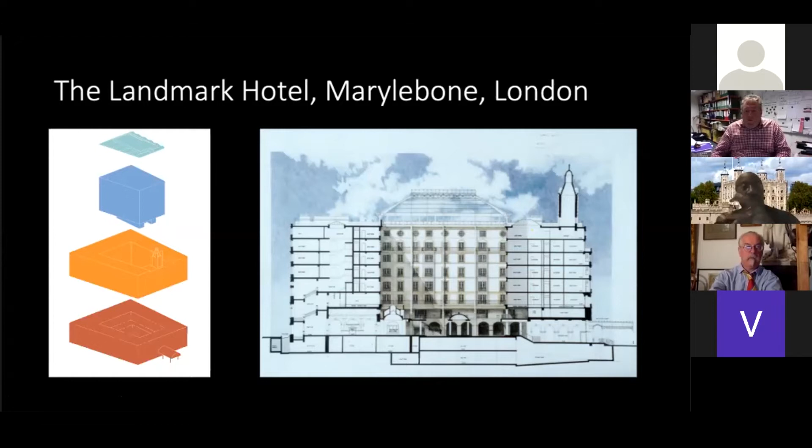We also created new internal atrium elevations, which were faced with Pyrox cement boarding, and there was the creation of a new subterranean car park. So what I want to constantly reiterate is that the architectural brain thinks on a macro scale as well as the micro scale. So it's the concept of the building in its entirety, but the elements at the same time that make up the building.

So moving on to a typical plan. The innovations with this particular scheme involve the green rectangles here on the left-hand screen, which represent prefabricated bathroom pods, manufactured in Germany. This model of bathroom pods is replicated on all of the floors throughout the hotel. It was a precursor to MMC, modern methods of construction, and it was one of the first major commercial hotels in central London to use that strategy.

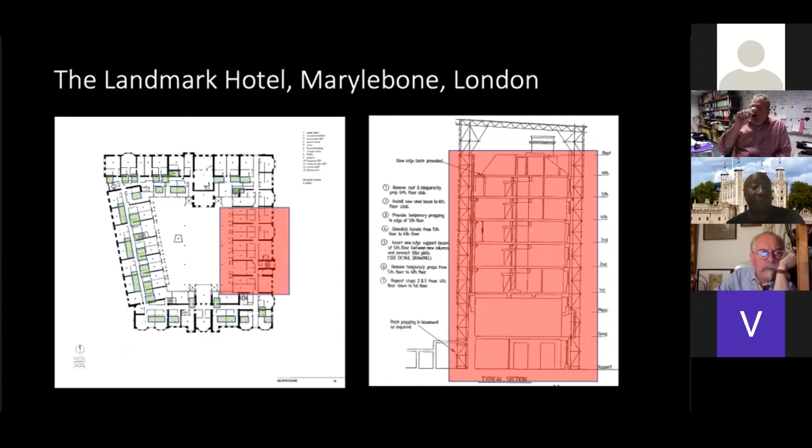The red zone here on the right represents the east and west wings, where the actual width of each wing was respectively expanded. So this is a construction drawing which shows the wing being expanded to allow for an increase in floor plate depth and the accommodation of larger bedroom suites.

So here we have the representation on the left of what was done with the new atrium facades. In the spirit of the existing vocabulary of the architecture of the building, we created new atrium facades which were made out of cementitious board, pyrox boarding, and mold formed shapes, in particular around the arches and circular windows and keystones within the elevation vocabulary.

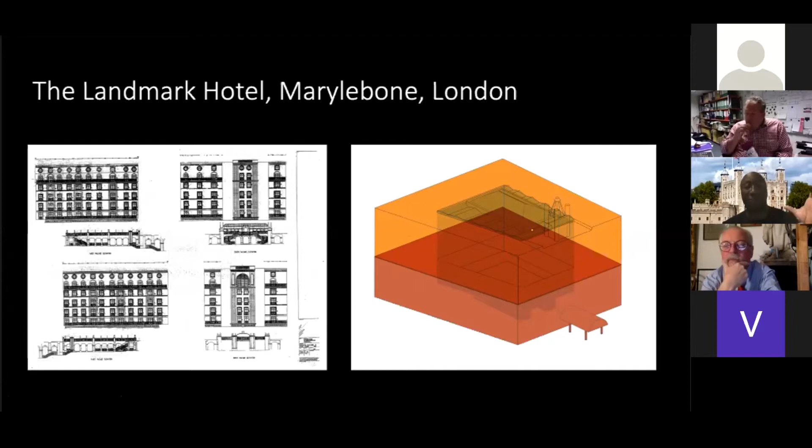So again, we're looking at the whole, with the Gestalt theory, looking at the whole, the sum of the parts, as opposed to the parts in isolation. That's what an architect thinks about. We look at the parts, we look at the components, and we look at it as a whole. Just moving on to the next.

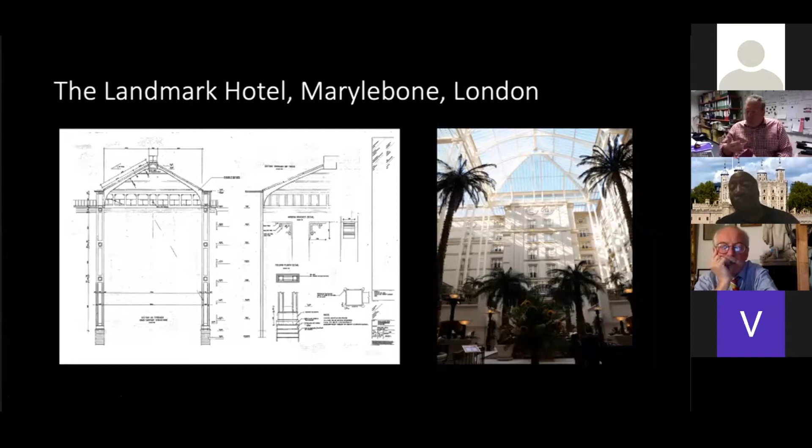So here's a space. This is the main piazza space as it was described in our strategy. We created a new portal frame structure to support a new patent glazed roof that spanned over the former open air courtyard. This courtyard was exposed before. It was white glazed tiles, very unremarkable appearance, but now we've transformed it into a new atrium space with the new supporting structure.

So who's the next person? Paul Singh, what do you see? We'll talk about it later.

Next scheme, former police station at Eaglesfield Street in Maryport, Cumbria. What was the brief? The brief was simply set by a developer. He wanted me to maximize the land value with planning gain and adapt a very unusual footprint, which was a former police station with cells and an adjacent stable site.

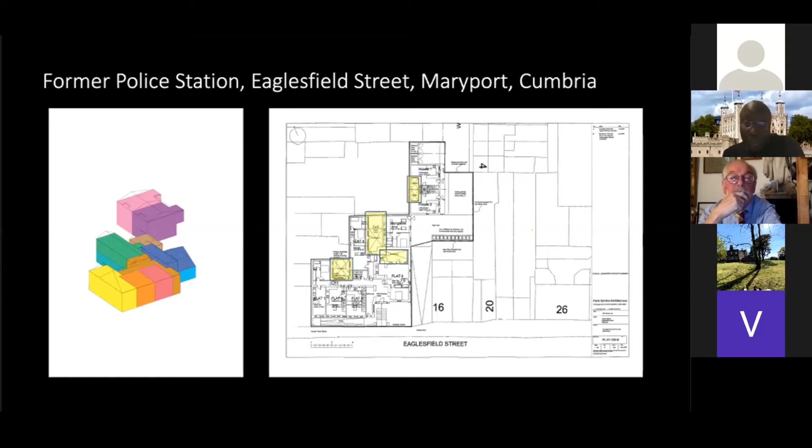So also in terms of context, the scheme was looking to integrate, this slide's moved slightly, to encourage a pedestrian passage through the site, which would allow transfer for pedestrians through. This had been sealed off by the council, the former police authority, with a solid brick wall. So it's to encourage through passage of pedestrians here, as well as making provision of the new housing here, which was formerly a large stable, and additional accommodation at the first floor level of the existing building.

So looking at the components that constitute the building, what I tried to do with this diagram is to break down the components that constitute different types of residences. The orange are mezzanine apartments, the blue are single-story apartments, the yellow is another apartment, and then you've got a rear apartment here, the courtyard spaces highlighted in yellow here, and then the two residential properties at the back, which slot in here essentially to marry up with the existing grain of the adjacent housing. So moving on.

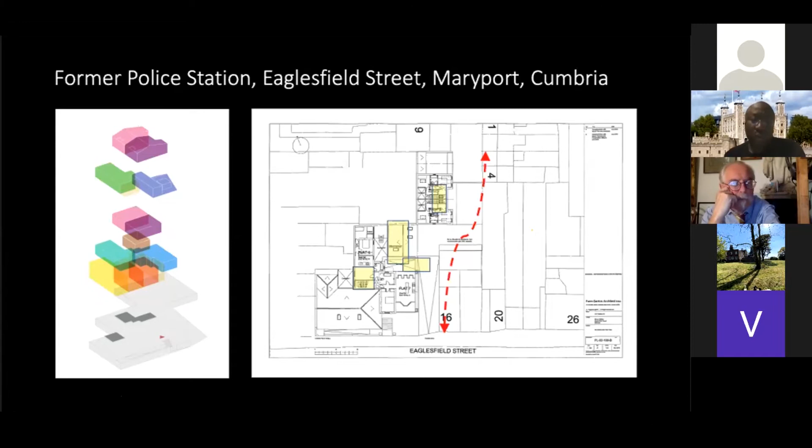Again, what I'm trying to show here is that it's the sum of the parts that constitutes the scheme in this particular arrangement. It's very inconsistent elevations. They go up, down, gable ends, hipped ends, all constituting the same building, but they make up these almost micro components which constitute the scheme.

So these knit together almost like a Jenga toy. Well, it's not a toy, it's a building. Conceptually, it's like a Jenga composition, but this is how the building was actually configured, and to make the most of this configuration was the objective, and at the same time satisfy the developer's requirements. The ultimate achievement was 11 development units that came out of this scheme. So he was very pleased with that.

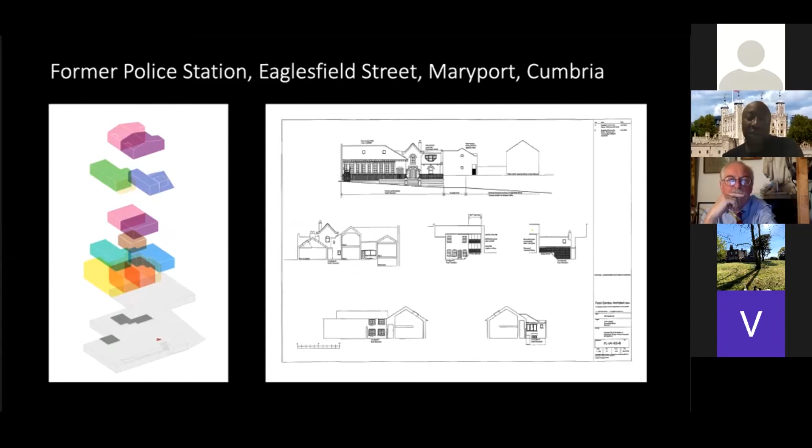So moving on, another elevation that's showing the juxtaposition of different elevations, different scales, and it was all part of the existing vocabulary in this particular building. Very unusual texture and composition, which had to mesh with what was already there. So moving on,

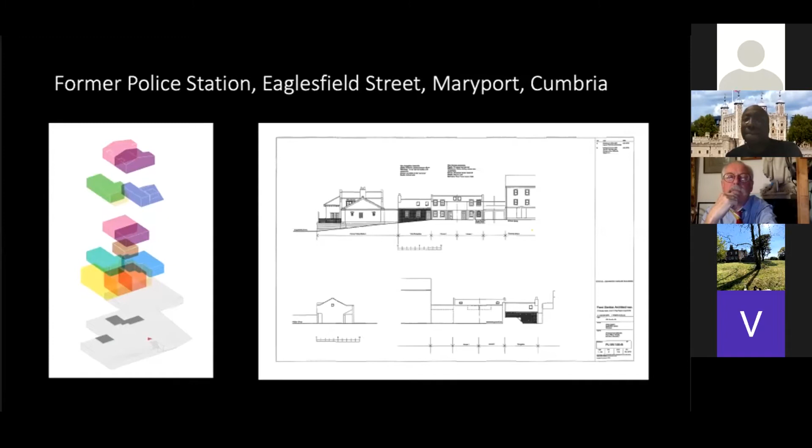time swiftly. Diana Crouch, what do you see? Don't worry, we'll talk about it later.

The next scheme. 5 and 6, the Embankment, Putney. The brief for this particular project, I'll show you the location. It's a unique location in London, the riverside by Putney. The Oxford-Cambridge boat launch is actually a bit further down here. The Oxford-Cambridge boat race takes place along here. So if you watch it regularly, which will be coming up, you'll recognize it.

So it's essentially these two properties on a short terrace. The developer had a particular brief. Let me just flick back. The brief was to create two distinctive prime residential homes from two terrace properties. So let's flick back to this. So what was the strategy? What was the context? The context you can see, the strategy being to create

a family home and a slightly more open-plan, modern free-flowing home with more free-flowing spaces as opposed to conventional confined box-like spaces which you'd have in a traditional Victorian property.

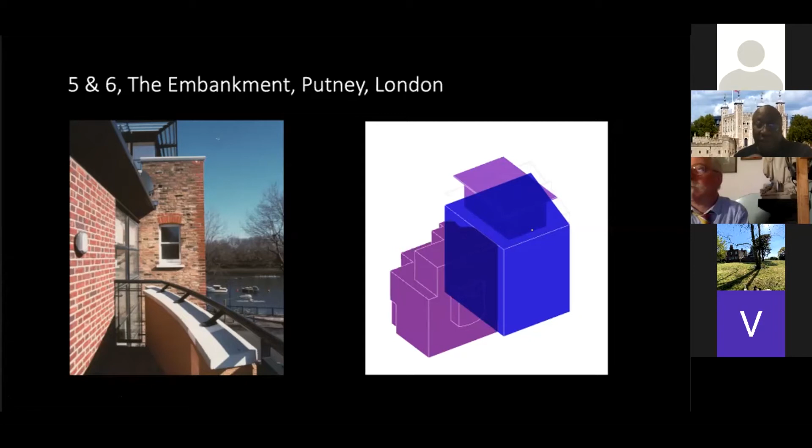So let's have a look at the appearance and the detailing. This is an image of the roof, one of the rooftop studios. There are 2 flanking studios. Maybe I've gone a bit quickly. I might drop back to show you the axonometric again. Here we go. You've got the 2 glazed rooftop studios and the extension to the rear. And then we have the River Thames running in front of the properties here. So let's move on.

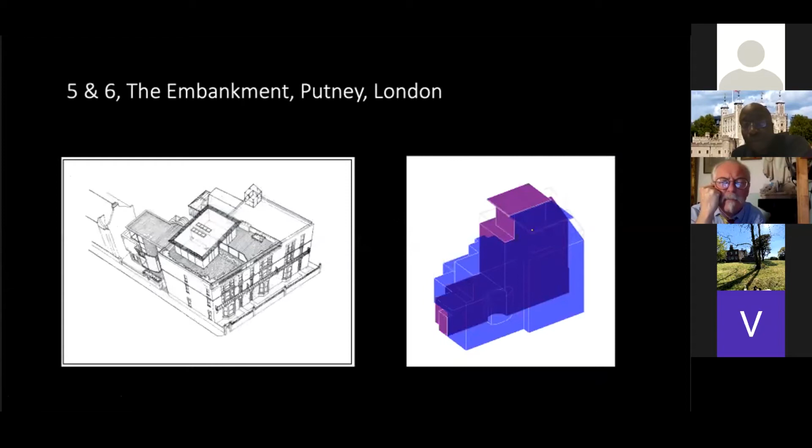So the next image is representing the interplay of transparent. I suppose we like to use other words to describe our conceptual elements. We use different vocabulary as architects do, to capture the magic and the poetry which we're trying to achieve. So we've got the interplay of transparent and opaque elements, which essentially is the glass, the brick, and the render.

So they're giving that interplay and that dynamism, the potential reading of floating masses, floating elements, and the magic of light behind it, illuminating these elements. So let's move on to the next. This is more of an architectural realization presentation. So here we have the footprint of both of the properties. The one that I've just shown you on the corner here is represented by this property here.

The River Thames runs in front here, the embankment, and the second property is here. So number 5 and number 6. So also looking at how space can be actually configured in a different context with the modern house, or the so-called modern house. The staircase was configured in the center of the plan to enable accommodation to act as a buffer between the old property, the old fabric, which is here, and the new fabric here.

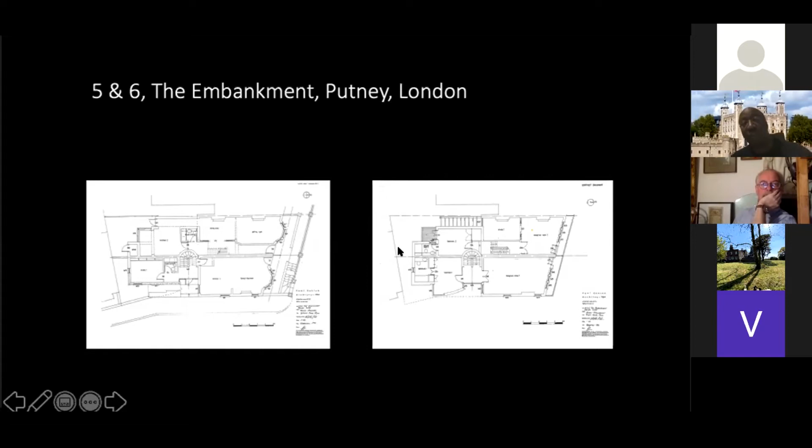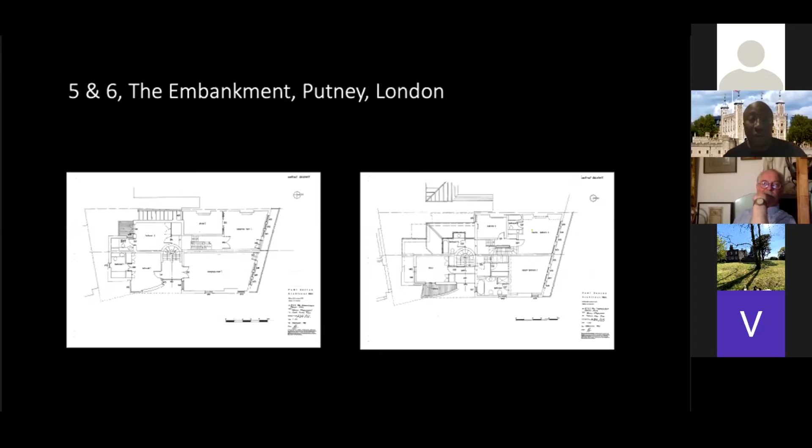In so doing, removing the staircase out of the heart of the footprint frees up much more open spaces and gives a different dynamic from the more traditional footprint with your Victorian house, front door, staircase wrapping its way up as you go through the property, which eats into the footprint, as you can see. So these were ideas that were being explored at the same time as trying to satisfy a client brief, which was very well received by the developer in the end.

So here's an illustration of the rooftop configuration with the studios and how the studios are accessed internally. And there's quite a terrace there for both properties, which achieves one of the key objectives with views and vistas on this unique location at Putney on the Riverside.

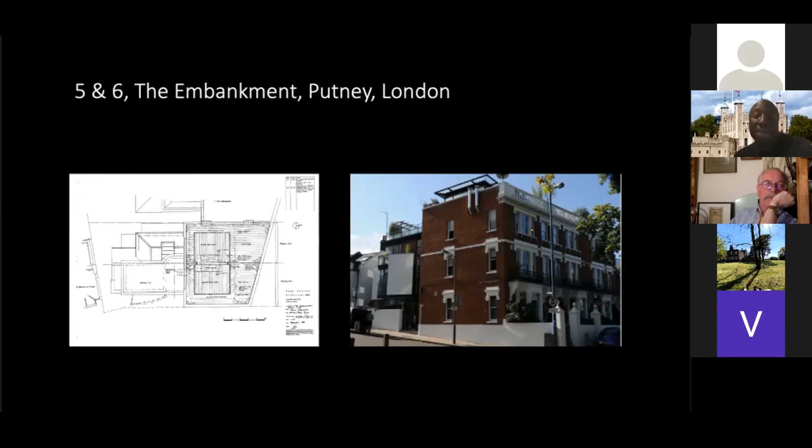This is the existing fabric with the introduction of the new studios on top. And here's the existing element with a new studio on top, back, and the extension to the rear buffered with the glass and the new extension. So it's the interplay between new and old, and it's buffered with a glass element. It gives you that dialogue between solid and transparent components.

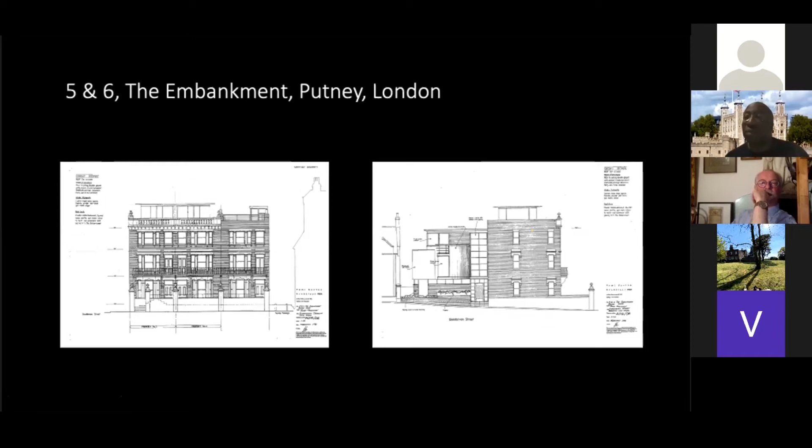Paul Singh, what do you see? Tell me later. Do you want me to tell you now? Tell me later. Okay. Okay.

His key drivers for this particular project were that he wanted to attract and retain high caliber staff from around the world. He literally went around the world to get the nurses, junior house doctors, junior consultants. He wanted state-of-the-art medical equipment, and he wanted this environment to be outstanding.

So what was special about this? Well, this project involved extensive briefing with the clinical team and consultants. It was used ultimately as a professional case study in the Architect's Handbook, and the design is used as an exemplar for the HBN Health Building Note Standard for ICUs. So let's look at the concept and how that translates to reality.

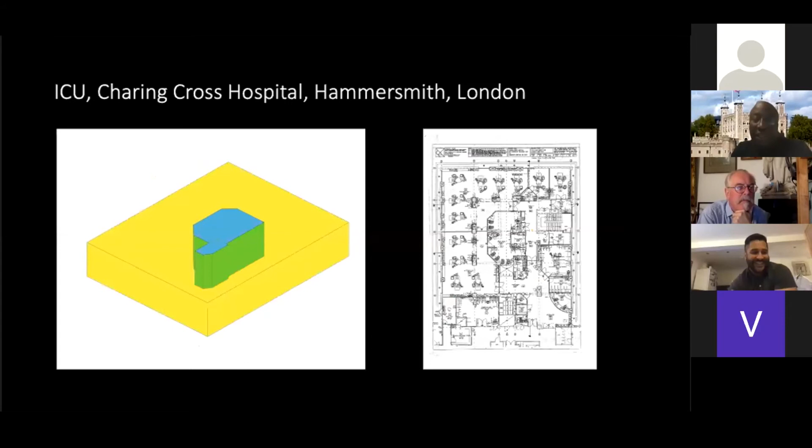The components of the plan, again, back to the architectural psychological perspective in terms of theory. We've got a unit in its most basic form as a core with a multi-bed space around the perimeter. But in its actual execution, the core is maintained, which is the blue zone, and the pink zone are the multi-bed facilities. And then we've got the other zones, the other elements, the other components constituting the ancillary support.

We've got another operating theatre. We've got a specialist operating theatre contained within the unit. We've got its own pharmacy, and we've got its own dirty and clean utility, which removes the need to leave the unit. So everything's contained within the unit. So we've got ancillary space clustering around the key spaces that they're serving, with appropriate adjacencies and functions working at the same time.

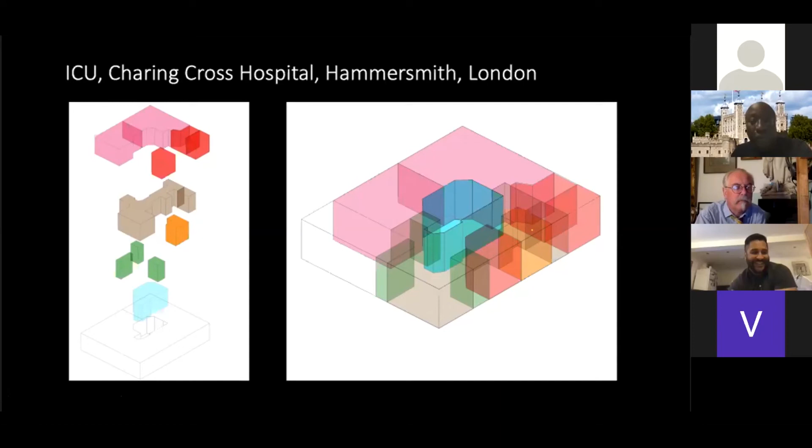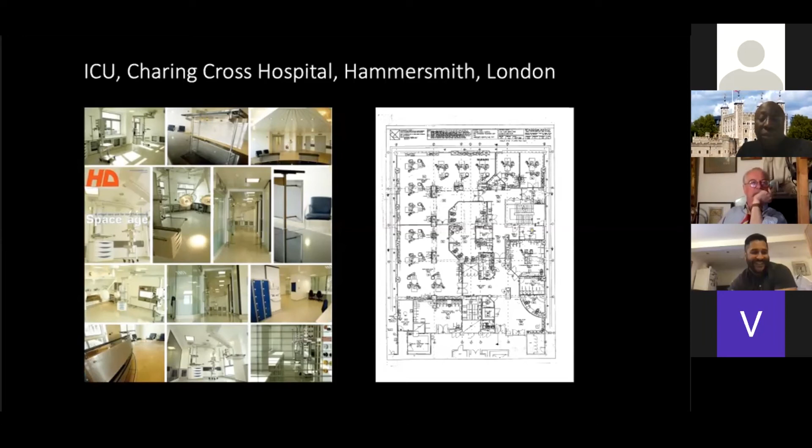So next time you see an architect in a design team meeting and you wonder, what's he thinking about? Where's he going with that idea? He's probably thinking about two things at the same time, and if not two, probably more.

So at this juncture, I feel my presentation is finished. I've tried to keep strictly to our time allocation, and I'm happy to take any questions, and I'll try and answer them. Thank you very much.